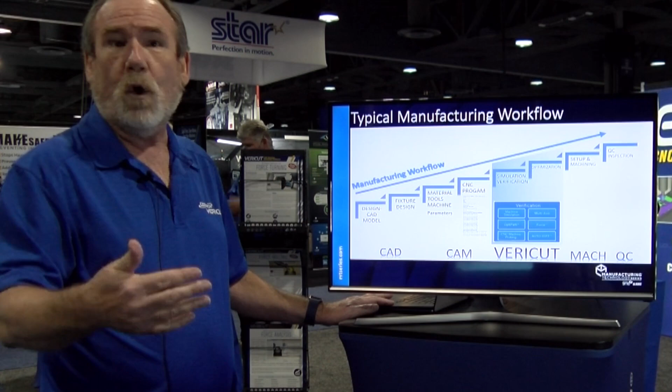So that optimization then comes in. How can I take that job that I know runs good and make it run even better?

Well, some of the common optimization strategies are to change the way you cut parts, such as a new CAM system, trochoidal type cutting, things like that. Maybe a new machine, high speed, that's taking care of business for you. Or maybe new cutting tools. All of those things are good ways to get started, but there's even more.

So some of the other cutting paths, dynamic milling, volume mill, iMachining, profit milling, all different types of material removal methods that we've proven in certain instances do work better depending on your material removal of the parts that you've got.

So things we call the silent killers of manufacturing, things that are hurting you while you're running. So if you've got a well-oiled process, but you don't have enough oil, these are some of the things that can happen to you. Your tools load up, you're burning up tools, poor cutting methods, you're either over-aggressive or even under-aggressive. So if you're not aggressive enough, your tools will rub and wear out. Your bad part finishes, chatter in the corners, things like that.

So optimizing those NC feed rates, that's how our optimization works. We're looking at maintaining a constant chip load.

So which NC programs make the best candidates? Well, milling and turning, we can optimize either of those. So any existing NC program, and the reason we say that is because we're using and processing the G-code file. We're not actually utilizing the CAM data. It's the post-process data that actually goes to the machine.

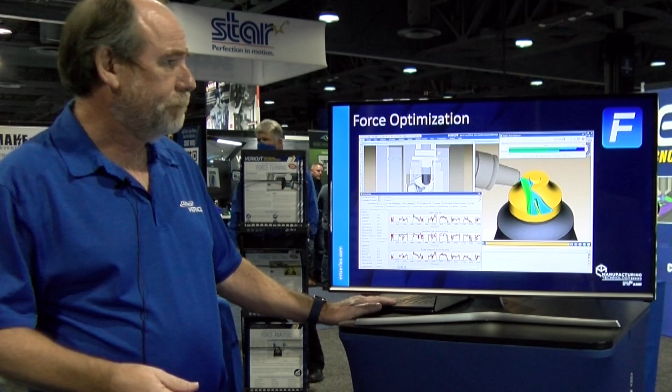So talking about the physics, if you look at the material hardness, the cutting tool, the CNC limits, the NC program, all of those things come together right where this bullseye is at. Everything happens at the tip of the tool. So how do we manage all of that, all of these things going on at one place at the same time?

So we want to maintain an ideal chip thickness. Right now, we look at things and we say they're upside down because we choose one particular feed rate and the cutting conditions are all over the place. That cutting condition changes. I know with our CAD/CAM systems, we tell it what chip load we want to cut at.

And that's fine if you're taking a full cut just like this. If I'm getting a 90-degree cut there, I'm gonna get that full chip load exactly the way the manufacturer expects it. But the reality is that we're not always cutting a full 90 degrees and getting this chip load here. We're cutting a smaller portion and we're ending up with a chip load that is something smaller. So now we're underutilizing our cutting tools and we're taking longer to cut that part.

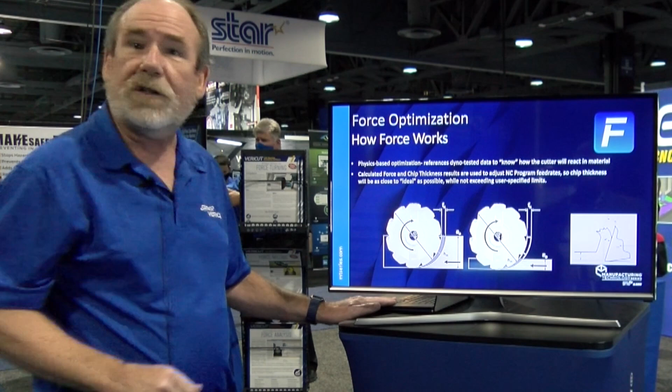So what if I could speed this up so the chip coming off of here is the size of that chip right there? That's what our optimization, force optimization, is doing.

So we want to maintain constant chip thickness that's correctly matched to the cutter that we're using. So we start off, well, where do we get this information? We could have gotten it right out of the machine catalog from the vendor, or maybe we have some information from history. We've cut these parts before, we know what works good. Either way, you need to come up with that perfect calculation for what I should be cutting, how I should be removing that piece of material.

So the result of an inconsistent chip load is what you see in the images here. A thin chip, not taking a big enough bite, is actually rubbing the part. And something more aggressive is going to either chip or could cause chatter on your part. So you're going to end up with excessive tool wear, and your surface finish on your parts is going to be not the quality that you're looking for.

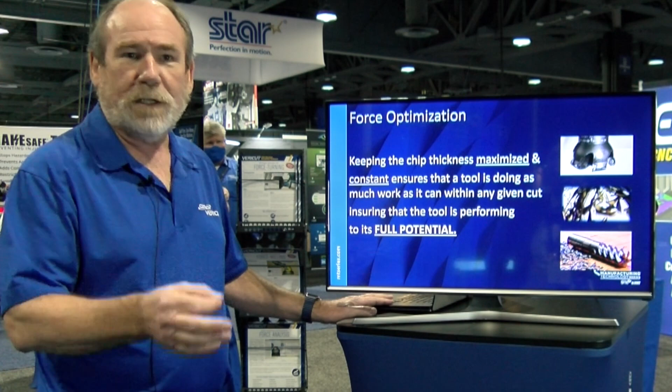So keeping the chip thickness maximized is what force does. We maintain the constant chip thickness by increasing and lowering the feed rates as the material's being removed, using that tool to its full potential.

So benefits include, when you do this, substantial time savings, 20 to 30% on average, better surface finish, improved tool life, less hand and bench work needed, and less wear and tear on your machine.

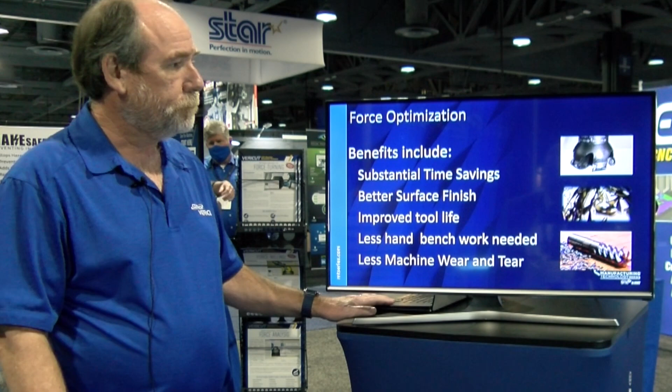So just a simple example of a typical cut: small cut, medium cut, heavy cut. Either way, in your CAD/CAM system, you've chosen one feed rate. Although they can vary in some instances, most of the time that's just a single feed rate, removing the entire material from that pocket or that area of your part. So faster feed rates equal opportunity, opportunity equals savings.

So a typical NC program outputs a feed rate per cutting operation. You choose that pocket or that periphery or that area of the part that you want to cut. You choose a feed rate based on the type of material you have, the type of tool you're using, and how you want to remove that. The problem is that's really upside down.

What we're doing is, well, in today's NC programs, the feed rate's fixed and the chip thickness is all over the place. But we really want the opposite of that. We want that chip thickness to be constant and allow us to move the feed rates all over the place.

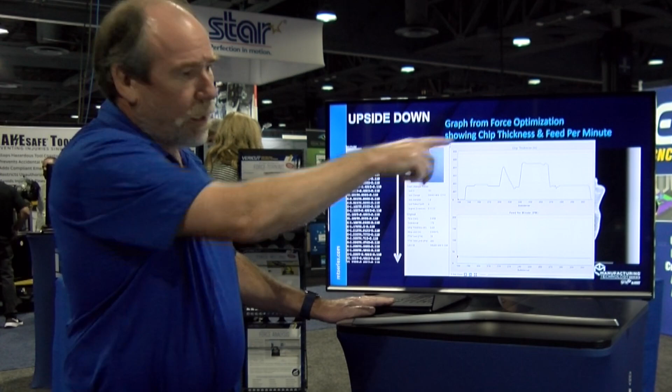So here's a graph from Inside Force Charts, or Inside Force Optimization, and you can see the chip thickness here is kind of bouncing around. But if you look down at the lower graph, the feed per minute is constant. That's how it comes out of the CAD/CAM system.

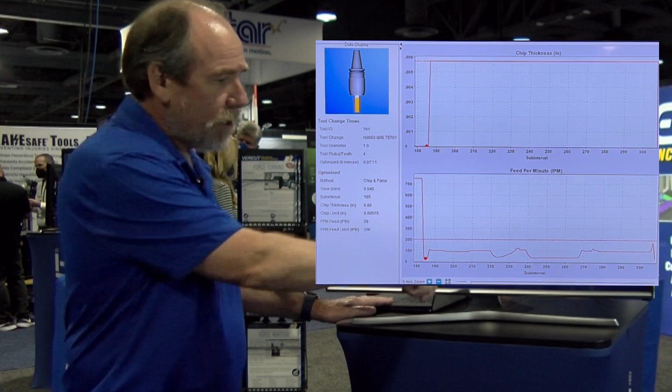So what if we could change all that, change the feed rates, and make the chart look like this? So our chip thickness is straight across the top, maintaining that constant chip thickness, and change the feed rates all over the place. Your tools last longer, your part surface finish is better, everything is better.

So if you look at the NC code here on the left side, you can see that the feed rates are changing all the way down because we've optimized it instead of just choosing one feed rate and having our chip load all over the place, wearing out our tools prematurely.

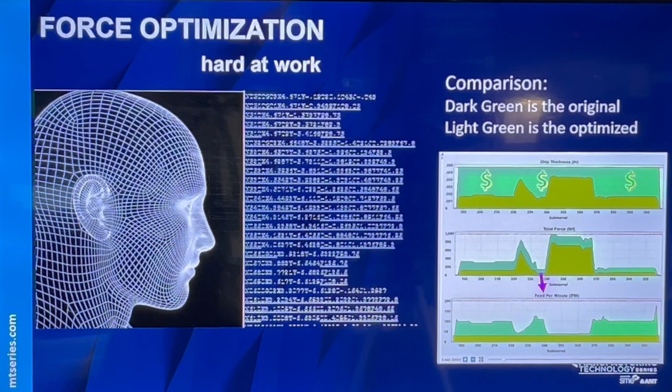So looking at this comparison, you can see that the area above, we call this opportunity where the dollar signs are at, because we're actually going to increase those rates, make that program run faster. It isn't always about how fast can I push this and make it run. We're maintaining that chip load per the manufacturer or per your known values that you can cut with.

This is a comparison of two different programs, the original on the left side and the Force Optimized program on the right side. You can see gaps here, where we've taken this line of code and broken it up numerous times to change the feed rates because the chip thickness is varying. We bring the feed rate up, straighten that line out, get a more constant chip load, and we do that by knowing the cutting conditions and increasing the feed rate along the way.

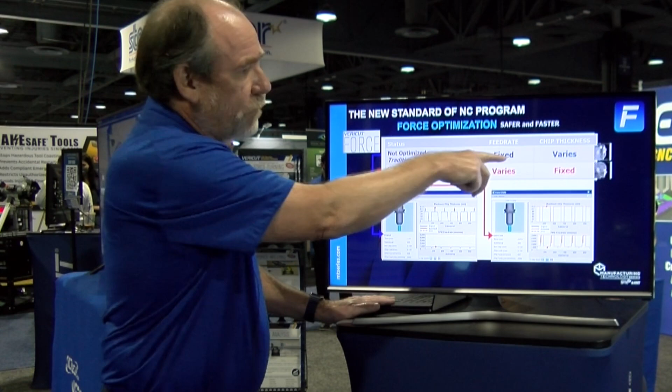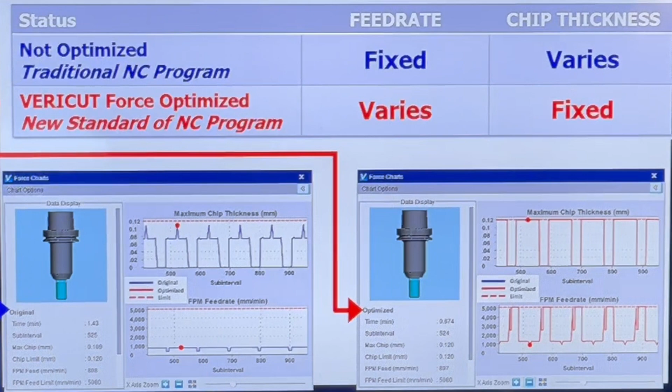Looking at these two graphs out of Force, the blue one here is the fixed feed rate and it varies coming down over here, and you can see all the spikes in chip thickness. If you look at the chart on the right side, it's showing a more constant chip thickness and the feed rate is varying more, which is where we want it to be.

The reality of changing cutting conditions is that it would be next to impossible for somebody to go in and monitor their entire tool path, looking at the cutting conditions and making that change to each and every line of code. That's why with VeriCut and Force Optimization, we're continually monitoring those cutting conditions and making those changes on the fly.

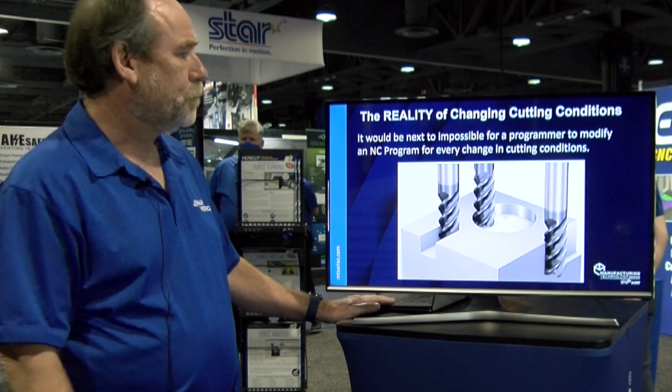Here's an example of how cutting conditions are changing while a part is being cut. You can see the black areas here are the engagement - a little bit up on the right side, a little bit less here. As it comes around the corner, it gets deep in there, and those cutting conditions are changing. You wouldn't want one single feed rate to handle all those different cuts. You want to break that up, get that perfect chip, make that cutter last longer, run that part faster.

So cutting conditions changing require that increase and reduction in feed rate. It isn't always about speeding things up. There are many times when programs are overly aggressive, so we have to slow them down. We have times when we lose a little time on something because it's programmed too aggressively.

Without force optimization, your cutting tools are typically underutilized. What constitutes a good program? Well, you didn't break a tool, you made a good part that made it through inspection and it's okay - but do you really know that it's optimal? That's what we're achieving here. We want that optimal - how fast can I really get these parts off the machine, good parts, not just get them off? I don't want to spend more time in the bench department.

So if we can optimize this, getting an ultimate chip load, better surface finish, faster parts, so you're saving 20%, that means every 5 parts you get one for free.

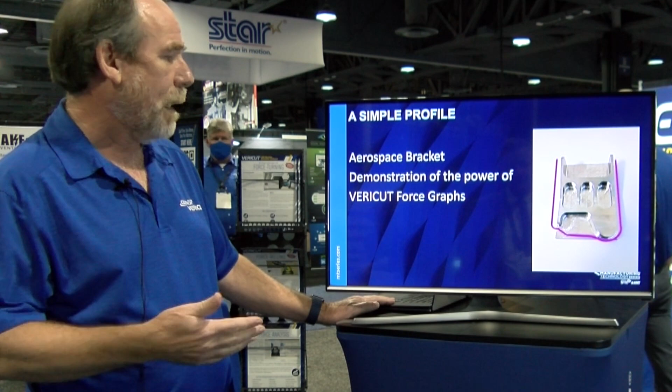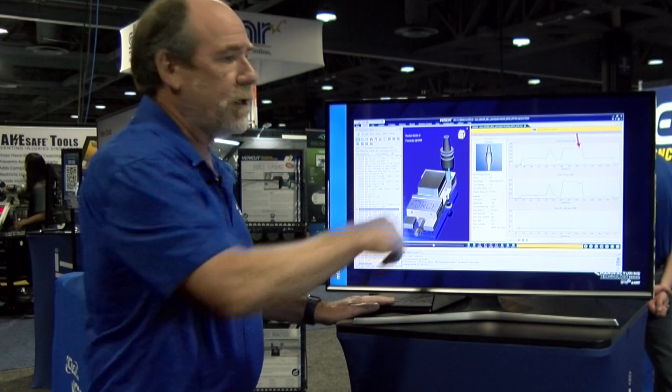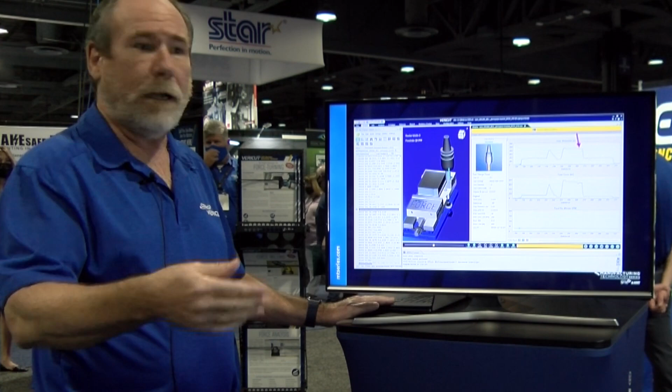Again, the graphs are showing the different cutting conditions. Inside here we can actually select information in the graph using our review mode, and it'll update the part to that particular time when it's cut. So if you see a spike or a lull or something that brings concern, you can select that and actually look at it exactly where it's being cut inside VeriCut. It re-updates the part material to exactly when that cut was happening.

You can see our chip thickness here is all over the place, and we've got our feed rates. I've got information here from the original program. In the optimized, we can actually see both - the original information is here, and the optimized program is showing me my radial width is different, the total forces, how much that piece of material is pushing back against the cutter as we're machining it. So we've got a lot of information here.

We can check for tool deflection, lots of things going on. A lot of people don't really realize what's going on when they're actually cutting a part. Am I making a good part is their ultimate goal, of course, but am I optimally making a good part? That's what I want.

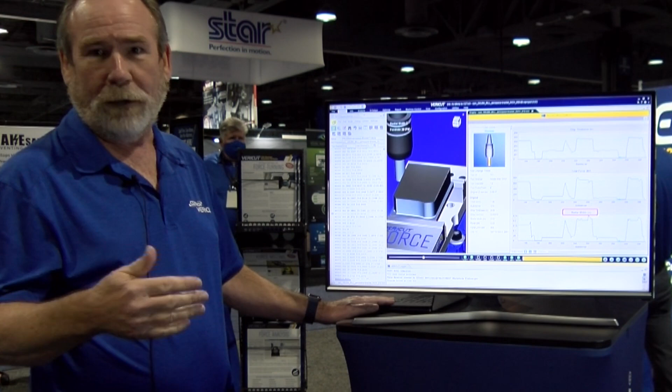At the end of this process, running your force optimization, we have an optimization savings calculator that shows you what the original runtime was, the optimized runtime, what the time savings is. If you want, you can add in some information to calculate what savings on a whole run of these parts or what your shop might save on average - how many machines, how many hours a day do you run, that kind of stuff. So you can calculate those as well.

So here is that part that I just showed you. These are real numbers - we actually saved, it was actually 37 point something percent. So let's round up, in this case, 38% savings on this particular part.

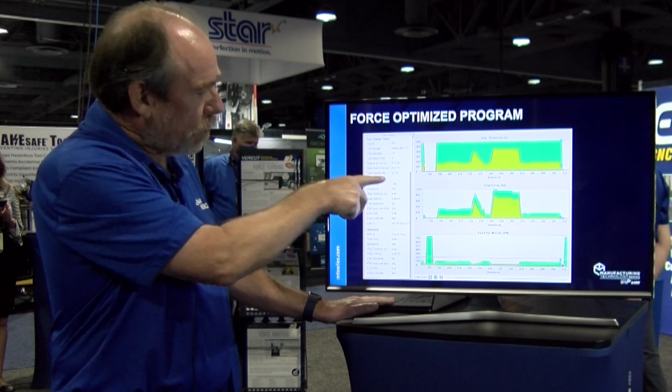The force optimized program showing the upper area in bright green is where we increased everything - our opportunity, our savings, our time savings there. You can see the difference as it's cutting - the blue line is the original program, the red lines are the optimized stuff. Looking at the data on the left side, you can see where we've got different chip loads and different feed rates going on here versus in the optimized. So you can actually see what are the changes that are actually happening as I'm running this.

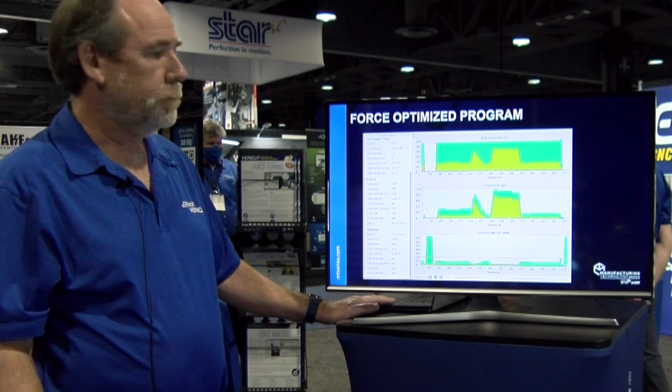So target FZ being your chip load. If the target's never reached, this is the opportunity that we're missing out on.

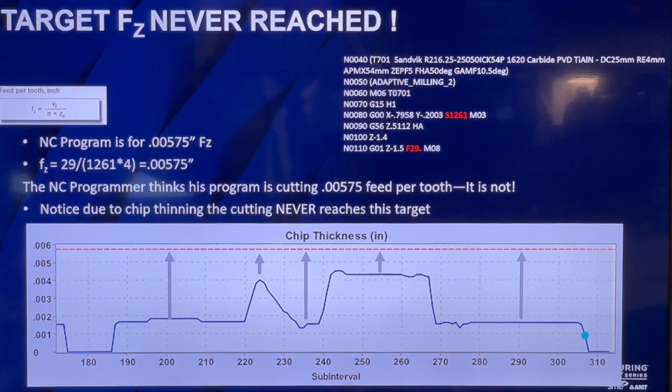And then the cutting tool properties - is this carbide, cobalt, high-speed steel? Is it an inserted tool? Because all of those things play a factor in this material removal process.

So block by block interaction, VeriCut knows continually when it's removing material, how much material, what that chip load is, so it knows when to speed up, when to slow down. You're too aggressive, you're not aggressive enough. Find that happy medium, and that end result is faster running parts, better surface finish, tools last longer. It's a win-win-win situation.

So the power of knowledge, and that's where these graphs come in. Those graphs are telling you the story that typically you know because it squeals when it goes into that corner. Okay, yeah, that's too aggressive, but it didn't break the tool and I can clean it up on the bench. So yeah, it's probably okay, but it doesn't have to be like that.

So if we optimize that, we know it's taking too much material in that corner. We can slow it down based on that chip load and actually give you something good.

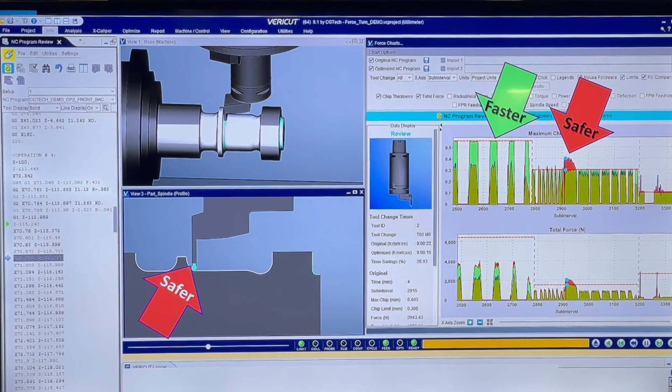So we've proven with force optimization in turning that we end up with a better surface finish, better parts, faster running, tool life lasts longer. Turning does not like intermittent cuts, so if I can maintain that chip load and keep that tool cutting more constant, it's going to save my tools. You can see here in the graph on the right side there, faster and safer.

As I mentioned, it's not always about speeding things up. In this case, you can see all of the red there. The program was too aggressive, so we backed it down based on feeds and speeds.

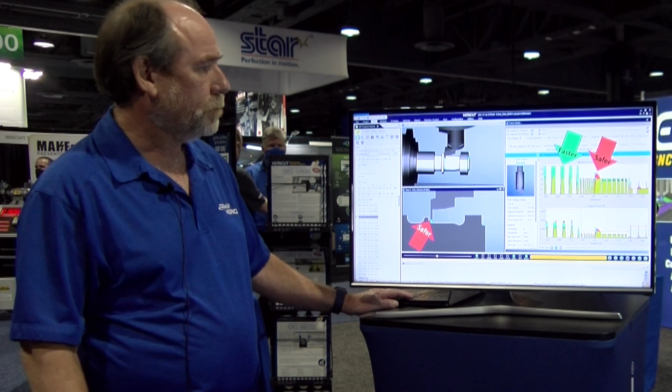So more benefits from force optimization. Part temperatures change, your cutting tool temperatures with force, so as we maintain different forces and cut back on our chip thickness, we don't accidentally work harden our part. So those are benefits automatically that you get from maintaining a constant chip load.

So everybody's making improvements, not just us, not just VeriCut CGTech with our force optimization. CAM softwares - I showed you some of the different cutting methods earlier here. Cutting tool manufacturers, they've got new coatings, new configurations of old tools, different helixes, those types of things. They're also working to make improvements along with VeriCut force optimization and machine tools, rigid structures, better tooling, better things to hold your parts as well.

So in summary, what do we get? When we optimize this and change these feed rates to give us a constant chip load, we get rid of those longer run times and that excessive tool wear. Extra wear and tear on the machine goes away. All of those things go, and they end up with a final result of 20 to 50% time savings.

Your cutting tools last longer. People just assume that your cutting tools, it's a given - I'm going to have to buy them and spend them - but they didn't realize until force optimization that actually they can make that tool last a whole lot longer than it used to.